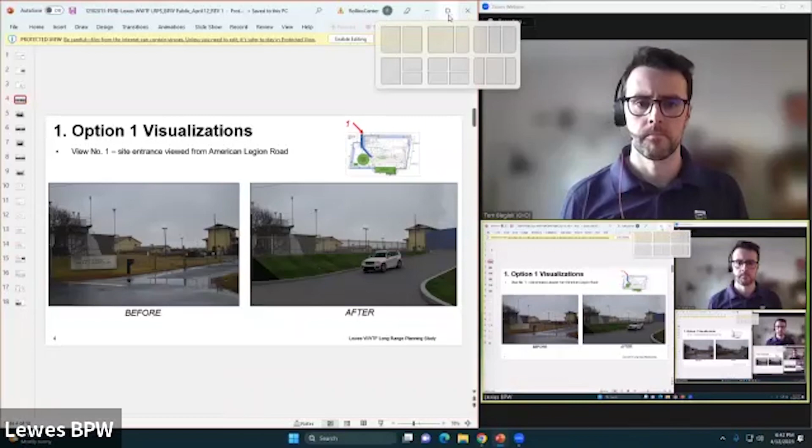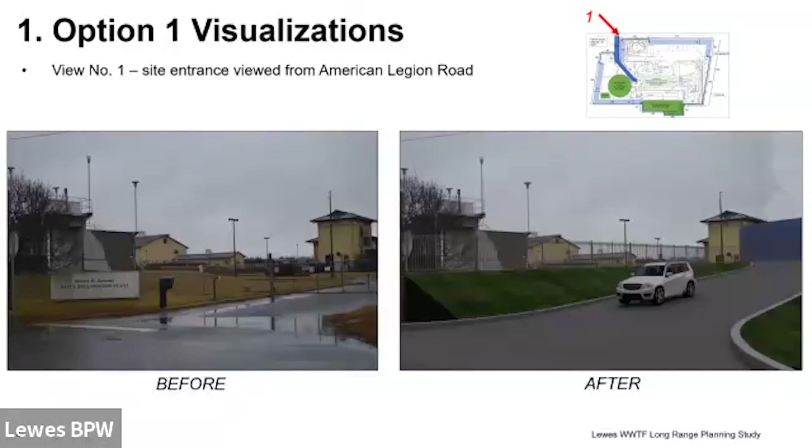Is there any way we can maybe not push Tom off the thing? Yeah, show the things. There we are, Tom. No, that's good. That actually helps me considerably as well. Very friendly view that we had previously. Thanks. Okay, excellent. This helps me too. I was following along on my own set.

Yeah, so in each case, we have a before and after shot, and then we'll go into the visualization itself in a little bit more detail on the next slide. So view number one, sorry, can you go back to the previous slide? So for view number one, if I draw your attention to the legend in the top right-hand side of the slide, view number one is looking at the site entrance from American Legion Road. So we have before on the left and after on the right. And some of the key differences, which you can see are, well, one is the color of the grass. That's purely a graphics thing. But the key change will be that the access road into the site will go uphill in the future scenario. And that's the new access ramp, and that takes vehicles up to the crest of the new perimeter flood barrier. If you can go to the next slide, please.

Can I ask a question? Yes, please. So on the green area, which is the blower room and the aeration basin, are those larger than they are today? But it was up in the right hand corner he was talking about. Okay. So up in the upper right hand corner, you had the new aeration basin and you had the new blower room. Are those being built out further than they are today, I assume? Yes, that's correct. And I'll talk about that in more detail on view number 3. But yes, those are an extension to the existing facilities. Okay.

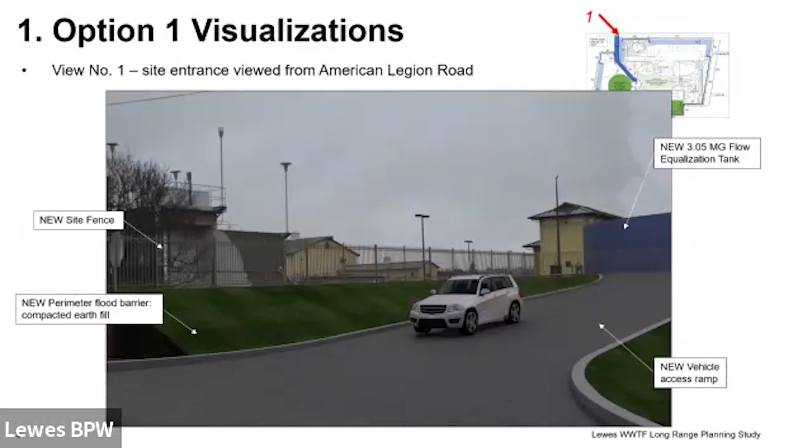So Tom, if you can, just for perspective, the rise from the road to the top of the berm in the option 1 visual, how tall is that in comparison to what's there now? It's approximately 6 feet above the existing grade. So if you were to pull out on the view more towards down American Legion Road, you'd see more of the perspective of the size of the berms. Yes, and in fact, perhaps if we go to the next view.

So if that's 6 foot, how high is that above flood level? That provides 2 feet of freeboard above the anticipated 100-year flood elevation. Okay. At 2050 with allowances for sea rise and coastal consolidation. Yes.

As we've talked about previously and noted in the report, there are 2 different types of perimeter flood barrier. So where it's feasible and where we have enough space, we have the compacted fill barrier with the grass seeding. But because this is trapezoidal and we have the 1 in 2 grade, it has to go up to 6 or 7 feet. It's reasonably wide. It's about 30 feet total width. And that means we can only fit it into the existing site perimeter over a certain proportion of the perimeter.

Okay, so if we can go to the next slide. So again, explicitly pointing out the new additions. You can see the flow equalization tank, the extension to the process building, the MBR building, and the new perimeter flood barriers.

So I just want to point out to everyone that this is from the Freeman Highway directly above Gill's Neck. So this angle, if you look at it, is looking slightly downward towards the plant. It's not the Gill's Neck view looking up. So it does give it a different perspective, but you get to see more of it from up high.

Okay. If there are no further questions on the visualizations, those are the visuals that we've produced. Those are the 3 views. Sure, we can take the questions at the sections here. Sumner Crosby, 558 Piletown Road. I'm sorry, I don't know the number, but how much bigger is that 3 million gallon equalization tank over what's there now? It's 6 times the volume. Thank you.

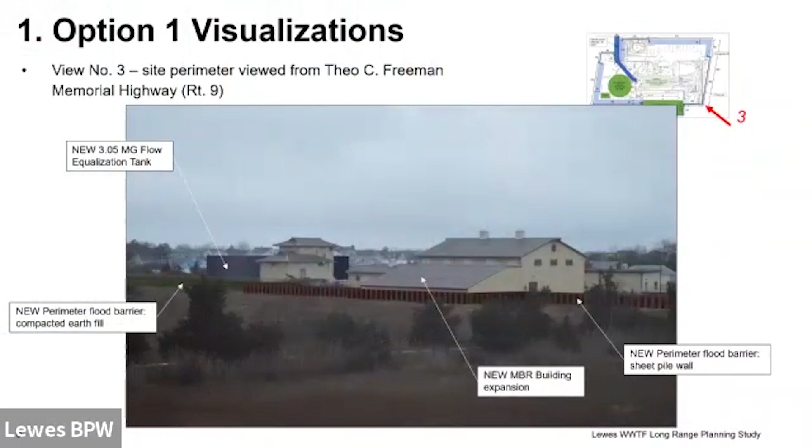I don't really have any questions. Jerry Burden, Kings Highway. Seems like we always have a double standard. Instead of putting a fence there, why couldn't we extend this, as you call it, compacted barrier? What I'm basing that on is because they're getting ready to dredge the canal and they're putting that waste there.

Why can't we just extend that and, instead of having grass, use natural cedar trees that grew there many years ago, when the dump was on the other side of the old railroad track? You had simple things like raspberries, blackberries. You don't have to maintain it. It's still going to hold the soil. Why can't we use that as a barrier instead of putting the steel in there in the long run? That's one thing.

I can't really answer that. Like I said, we always have a double standard. We can dredge a canal, but we can't put a little soil in there. Second is, why don't we do a 99-year lease on that property like the rest of Lewes Beach in that whole area? And before somebody says anything about the industrial area, don't forget there were two very large fish factories, SPI and some of the other commercial there. So why can't the board get a 99-year lease and not have to deal with the city as much? Not that it's a problem, but it can be.

I'm not sure, I didn't hear the last one. Can you... whether we can get the deed changed? Yeah. Or at least make it a little easier, less paperwork. I guess, yeah, it still doesn't get to technical issues. That's true, but I'll just bring these little things up. Tom, if you want to address the stability of the berm versus a natural. Yeah, I know it's the wetland, it's the marsh, actually.

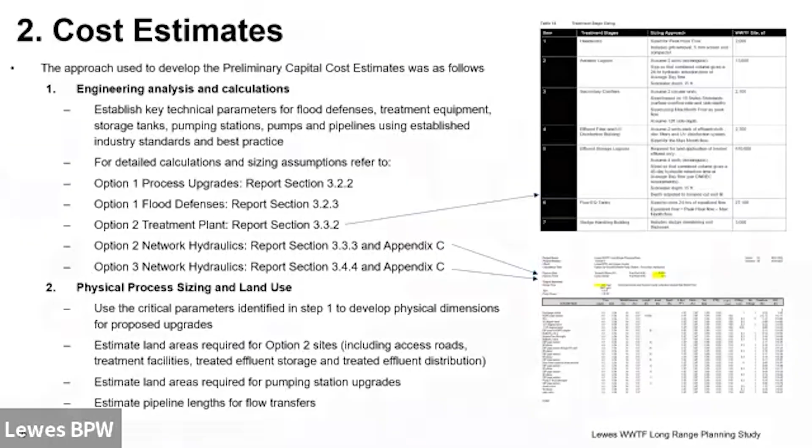Okay, in that case, Tom, we move on to the costs. Okay, thank you. Let me just preface, Tom. One of the comments we've seen from a couple of people was the phrase back of the envelope calculations for cost. The original study that GHD did included an Appendix D, which was like 30 pages of calculations for line items for the costs for all the various options. That's what Tom's going to summarize now.

But I encourage anyone who is interested and has trouble sleeping at night, huddle up with Appendix D. It has lots of numbers. And they're all real numbers, no imaginary. All right. No imaginary numbers.

Okay, thank you. Yeah, so as Tom was saying, we just wanted to provide an overview of the process that we use to come up with these costs, and really just talk through some of the key points. So I've broken this out into 4 broad stages.

Stage number 1 is the engineering analysis and the calculations. So we establish key technical parameters for everything involved in the upgrade. So everything from the flood defenses, how tall, how wide, treatment equipment, storage tanks, process tanks, pumps, pipelines. Everything stems from original engineering calculations. And really, I've listed some report sections here, but essentially everything that's in section 3 of the report, which is the main body of the report. All of the calcs, all of the graphics and the tables, really it's all the first stage in cost estimating. It's how we eventually come up with the quantities.

Yeah, and the other thing I would add is it's difficult expanding a facility in general, but the tight space that we're in would make the risks very large of keeping the existing plant operational while you're either changing or expanding. So, if it was a 200-acre site and we had lots of land, you could build a new plant, but that's not where we are. All right, Tom, back to you.

Yeah, so this has already been touched on. If people are interested, the itemized cost estimates are provided. They're in Appendix D of the report, and you can see the breakdown line by line to see how the costs are made up and to see what the major components are. But if you can go to the next slide,

I just wanted to touch on a few specific examples. So that's the cost estimating process. That's how we get to the bottom line numbers. And then this is the summary table that we've provided in the report. And there are a few key cost differentiators between the different options. And I think we've received some questions around some of these as well. So I just wanted to touch on a couple of specific examples relating to land purchases and network upgrades. So again, if we can go to the next slide, please.

So starting with land purchase. So the costs in this category vary considerably from $0. And again, the costs that we present in the report and that are shown in the tables here are the costs that would be incurred by the BPW specifically. So the cost for land purchase would vary from $0 up to 12.5. And I'll go through each option and talk about the assumptions that were made.

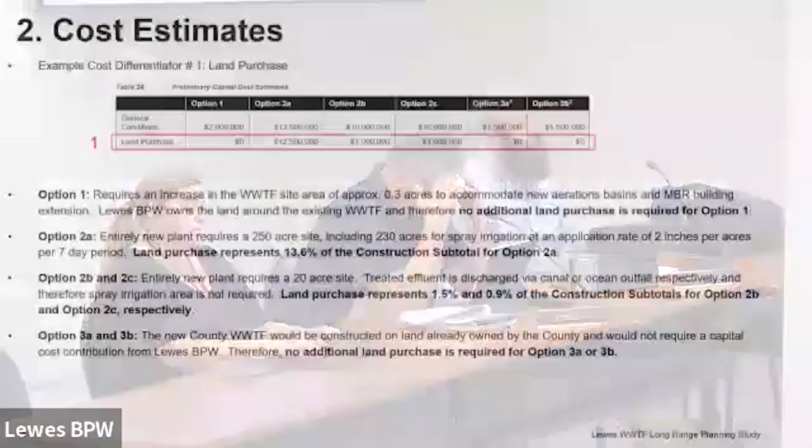So moving on to the option two sites, starting with option 2A, and as a reminder, option 2A is to construct a new wastewater treatment facility at a high elevation site and then discharge the treated effluent via spray irrigation at an application rate in line with the local regulations. Now, in order to do this, we require a 250-acre site, 230 of which would be for the land application of treated effluent. So it's a large land area. By far the largest land area that would be required, hence the high cost of $12.5 million. And that would represent land purchase for option 2A as a significant proportion of the overall cost. It's about 13.6% of the total construction cost estimate for option 2A.

So Hans, when you look at those numbers of 2 inches per acre on a 7-day period, is that a realistic set of numbers? Because you guys do this. It's somewhat on the high side. We discussed that back and forth, but we didn't want to drive the cost artificially through the roof. Only the soil investigative report can really tell you. But for example, the highest number we have in the base, each field gets rated individually, by the way. The highest one we have in the base is 1.9, and that's over a 7-day period. 1.9 inches per 7 days.

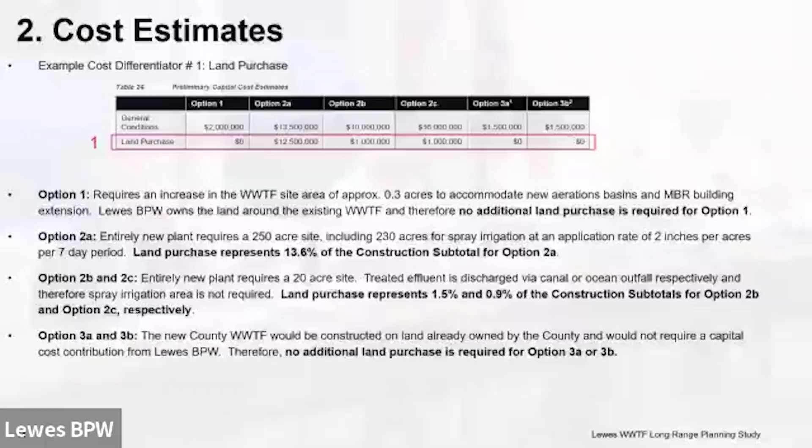Any further questions? Just one, so obviously you've been through these numbers before with us. And there's the 35% variance, I get that. How confident are you of these numbers versus where you were when you first put them out? Are you more confident, less confident? I mean, are we continuing to educate ourselves and adapting, or is this the line in the sand?

I have the same confidence in the estimates as when we put them out. The only slight caveat I would say is that we did the report in 2022, so these are all in 2022 dollars. Other than that, I have the same level of confidence in the values now as when we first published the report. And it's the same thing with the land. When we were looking at land, we looked at land that recently was closed in a relatively close area within the last 2 years. And we just did it on Sussex County's deed search.

Yeah, and the thing is that these costs are all consistent with each one of the alternatives. If the BPW selected an alternative, as we went into schematic design, which would be 30%, we would update the cost and let the BPW and the county know what those costs are. And they do fluctuate; also, we are in a tough economy, still impacted by COVID. Okay, thank you.

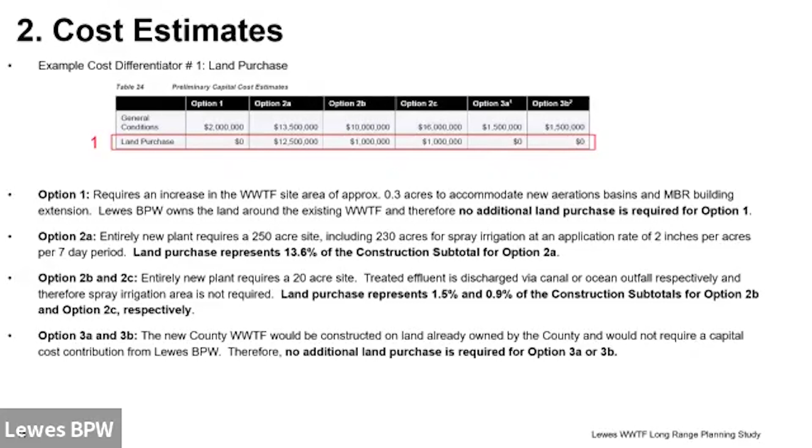Okay. Any other questions, or move on to the next slide, Tom? Yep, next slide, please. So the next category of costs from the summary table, which is a major differentiator, are network upgrades. Network upgrades are all the costs that are required to transfer raw wastewater to a treatment plant site and to transfer treated effluent away from a treatment plant site to the discharge location. And these vary considerably, from $0 all the way up to 49 million. I'll just talk through each of the options one by one, so you can hopefully get a better idea of where those differentiators come in.

So starting with the existing option one. It's the existing site, it's already plugged into the collection network, the lift stations are already in place and they already discharge directly into the treatment plant. Therefore, no additional network upgrades are required. There's already an existing outfall to the canal. And so the network upgrade costs are zero.

Moving to option 2A. So the network upgrades would include a new raw wastewater pump station, which is outlined in the report. That's to consolidate flows on the network and pump them up to the new high elevation site. As well as the pump station, we also have the transfer pipelines. And pipelines in public roads are expensive. It's a considerable cost component for any project like this.

As well as the material costs themselves for the pipes, you also have to do the excavation in the roads, the reinstatement, temporary traffic management. And once it all comes together, it's a significant component. And as outlined on the previous slide, for option 2A, we need a large land area.

Sorry, is there a question? Look at those numbers, because I know you're involved with your home and other things, do those numbers make sense to you? For the size of pipe they do. Would you recommend this, was it 16? Would you recommend a larger or smaller pipe? Just curious. No, that's the right size. Okay. I mean, you could go 14 if you had equalization. Thanks.

Okay, so for option 3A and 3B, the BPW, as discussed before, would only be responsible under the existing BPW county agreement. BPW will be responsible for a new raw wastewater pump station and also the length of raw wastewater pipeline from that pump station up to the existing agreed scope boundary, which is close to the location of the existing outfall of the canal. And the remainder of the pipelines would fall within the responsibility of the county.

So under these options, we have network upgrade cost estimates of $4 million. Still significant quantities, and in terms of the overall cost that the BPW will be responsible for, they make up 35%, close to the construction estimates. So that's all the content that we wanted to cover for cost estimates. Hopefully that provides a bit more of an insight into how the costs are developed and also where some of the major cost differentials come from and are generated when we compare the options.

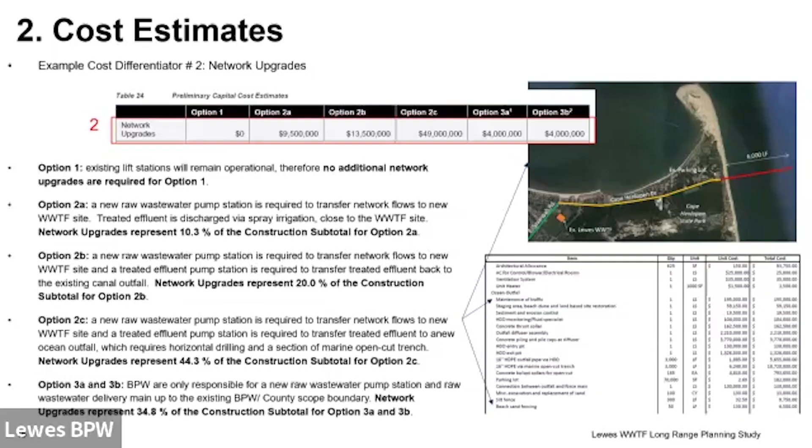But if there are any further questions. Different options, certain things obviously would take longer, an outfall pipe would take longer than making sure the wastewater treatment plant had a barrier around it. Is that taken into consideration on your math on how much these things will cost as well? In other words, when you're looking at something that's going to take longer, are you increasing the cost of that because of inflation and other things? No, these capital cost estimates are all in 2022 US dollars. So this assumes that these would be the rates that would be supplied at bid stage.

So, and I'm not a bidding person per se. So if we look at bids, I'm looking at you here. How would someone calculate what the costs are, right? When they're doing something that's really going to take place over a period of several years. So Tom, maybe I can take this. Earl, it would depend upon the options, but starting with option 2C, that could take 5 to 10 years to permit. So that's not taken into consideration. It sounds like what we're doing is we're saying we are shovel ready. Here's how much it's going to cost.

Correct. So there's more risk with the cost of option 2C versus option 1 or option 3A and 3B because they own the land now. Options 2A, 2B and 2C all rely on us purchasing new land, getting the permits, constructing everything, which provides more risk. But in my 30 years career, I would say that the biggest risk for the options would be the land application and the ocean outfall.

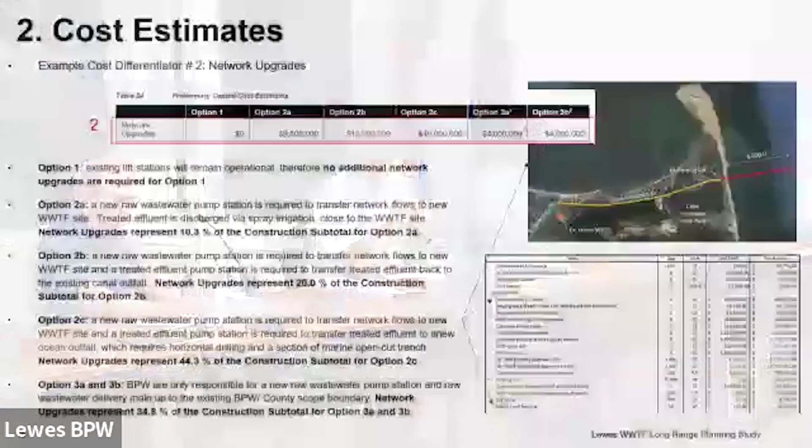First of all, I just want to applaud the new revised graphics here. I, for one, have been asking for clarification, and I really like this. It actually helps me present the basic question that I have. I have two things; hopefully I'll remember the second one. My basic question that I've struggled with is, if I read this graph on the screen right now, looking at the existing plant data and the height of the green bar, the second from the left, we're discharging 40 pounds per day of nitrogen.

Under any of the other options, we will be discharging 100 pounds of nitrogen. And yes, in order to not go beyond that 100 pounds, you have to squeeze more out of the system, however you do that, to get the concentrations down so that you don't exceed the 100 pounds. So the basic question I have, and obviously it's a little too early to tell, is does that make a difference? I think I may have said something like 2.5 or 3x. Maybe I even said 6x because I wasn't doing my math right.

My worry was pounds of nitrogen that ultimately are in the receiving water rather than the concentration at the discharge point. So I'm curious how that works. And one of the things that I didn't realize is that in the screen right before this one, there was a point that Tom made. It's at the bottom green item here in the comments below, as flow increases toward the rated capacity. It begs the question, if we wanted to reduce the loadings, what does it cost to add more retention? Is it prohibitively expensive? Am I reading that right?

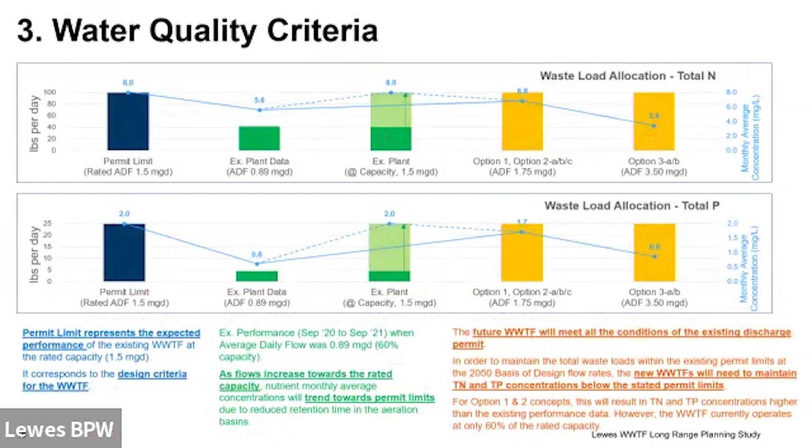Yes, in theory, you would need more facilities. Couldn't tell it would be prohibitively expensive, but it would certainly increase all of the costs. I mean, we could go to reverse osmosis and pretty much remove everything, Sumner, but the electrical cost to do that would be immense. And at the same time, when we did this study, we talked to the BPW, and what they didn't want to do is get into another very complex system, because there were issues with getting qualified personnel to Delaware to be able to operate that in this area.

And I appreciate that, but there's one other thing to be said. This is to squeeze another 10 pounds or 20 pounds of nitrogen out of any of the three 2050 scenarios. The energy cost is much higher, and we know where that goes, right in CO2. But you also have to look, if we do another remediation project like the county does routinely, the Herring Creek project alone, removing 900 septic systems out of the Rehoboth Bay, is equivalent to the full allocated permitted Rehoboth Beach discharge. This one here takes about 500 systems. If we take 500 systems out of the Rehoboth Bay, it would be equivalent to 100 pounds.

Does it change the environment? Does it change the impact to the biota? Are we going to smell chlorine as it's coming downstream on an outgoing tide, et cetera? If you point discharge, you have to fully dechlorinate. All right, cool. Thank you. On the spray, it's just the opposite. Okay, are there any questions online?

No? Just one comment. Has anybody ever heard of MBWA? Anybody familiar with that concept? Hewlett Packard started it in the 40s. It got popularized in a book in '81, I think it was. Management by Walking Around. You've heard. I walk 2 dogs around this town every day, twice a day. And when I first started that process, call it 3 months ago or 2 months ago,

everybody was talking about how the plant needed to be the best plant that it could possibly be. Everybody was leaning in very hard on the environmental side, as I do myself, by the way. What I'm starting to hear now is a change. And the change isn't necessarily technology based at all. What's changing is how much is this going to cost? That's what our customers are starting to lean into now. And I think that's positive because I think people see consolidation in certain areas that some like.

I think we need to have a chart, and we can't vote on this because it's in a workshop. I believe we need a chart from 1 to 2 to 2B to C to 3A to 3B. It looks at what are the hurdles, and what are the probabilities of success? What's the cost of those? Again, time, present value of money based on the timing that we've got. But if something's going to take 5 years to get even possibly done, we now have a wastewater treatment plant that's leaving the water for 5 years.